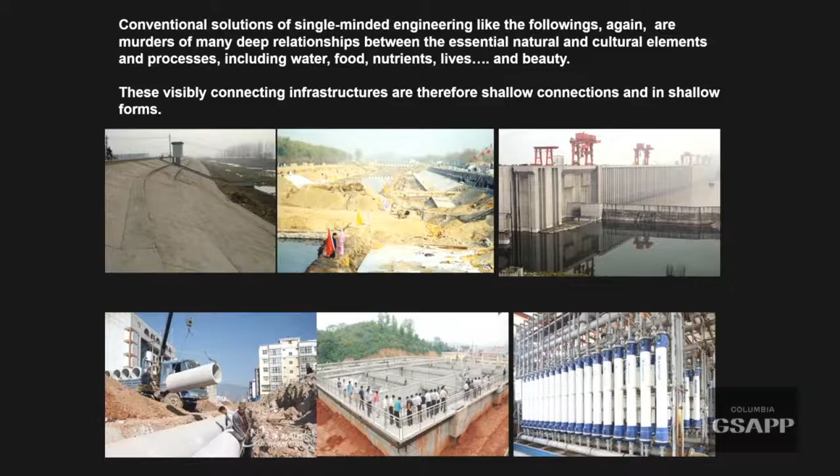And conventionally, the conventional solution of single-minded engineering is like the following: damming, dikes, pipelines, sewage plants. All these are actually, as I mentioned, murder of many deep relationships between the essential natural and cultural elements and process, including water, food, nutrient, lives, and beauty.

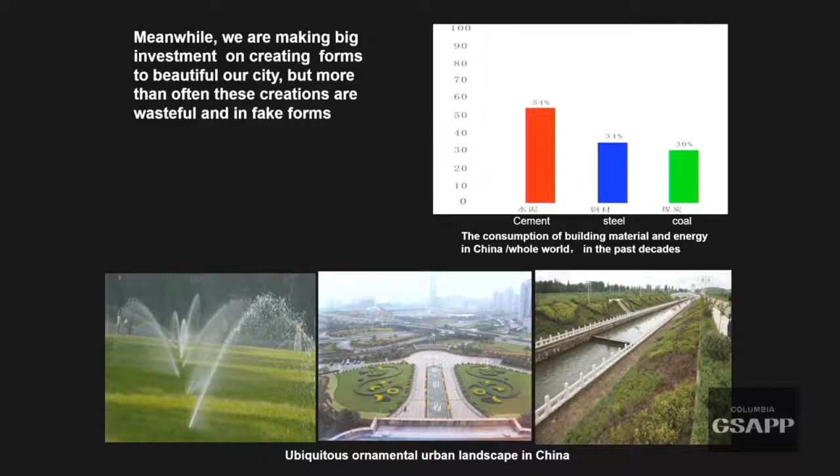Now these visible connections, connecting infrastructure, are therefore shallow connections and in shallow forms. And meanwhile we are making big investment on creating to beautify our city, but more than often these creations are wasteful and in fake forms.

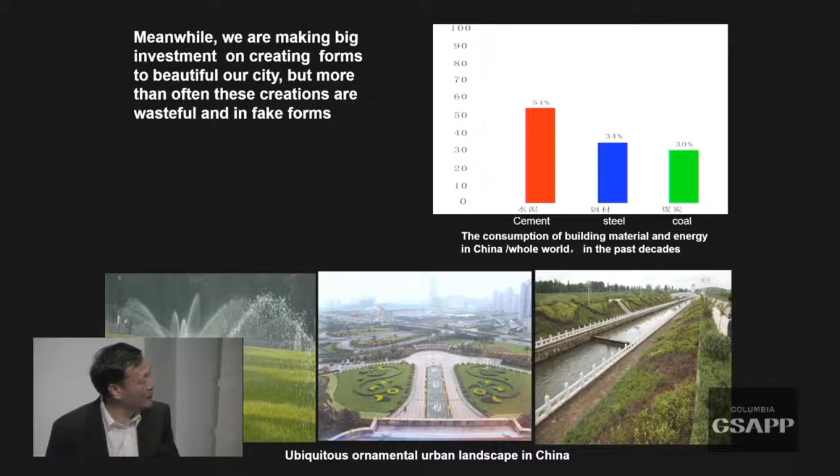In the last 40 years, almost every year China consumes over half of the cement, a third of the steel, and a third of the coal of the whole world, and builds something we call beautiful. So ubiquitous ornamental landscape, you can see it everywhere in China.

Now that's why I call it a revolution. I call it the Bigfoot revolution versus the small, gentrified little feet. So that's a different value, a different aesthetics. Now today I call this aesthetic the aesthetic of ecology.

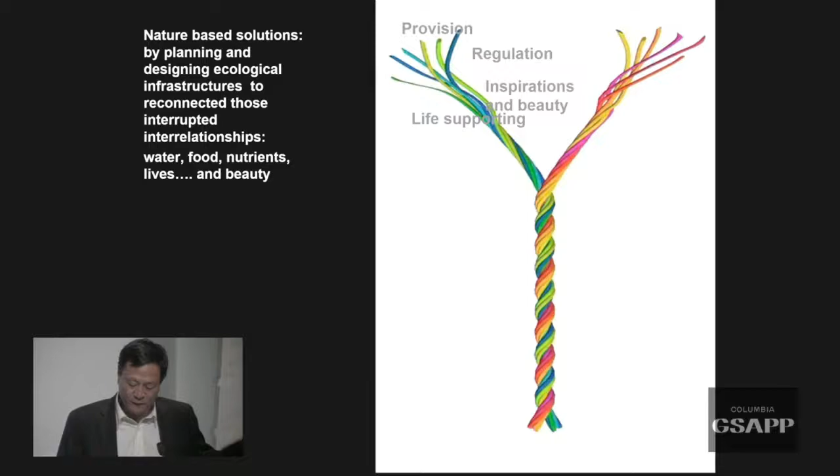So we need a kind of infrastructure, the nature-based solutions. So by planning and designing ecological infrastructure to reconnect those interrupted relationships—water, food, nutrient, and beauty. Such solutions result in deep forms that stand in contrast to shallow forms, which have only the superficial perceptual order.

And lacks the solidity of a coherent process beneath the surface. Here I describe as deep form the terraces, rice paddy—productive, beautiful, high performance, sustainable. And the other is shallow form or fake form, unsustainable, consumptive. And the shallow form can be at a larger scale.

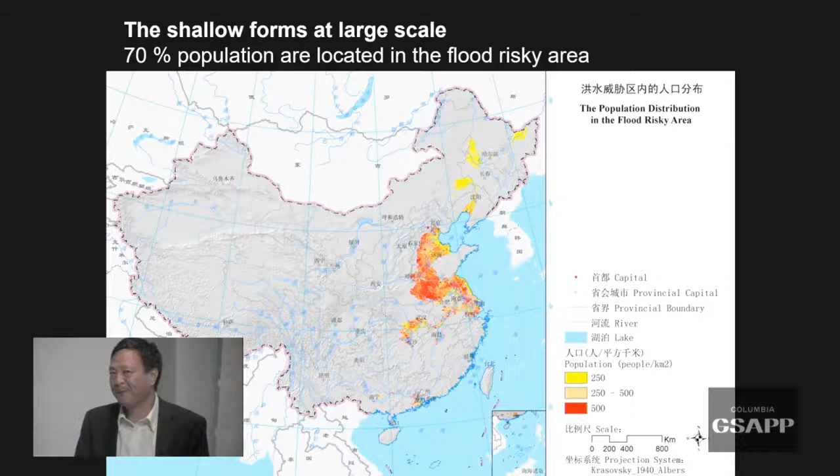Now this whole China's urbanization pattern—70% of immigrants, 70% of urban population are located in the flood risk area. Now this happened in the last 40 years. So this is a shallow form of urbanization.

So the timeless interdependence of human culture and nature has built up the deepest bond between peasants and their farmland. Therefore the creation of deep forms can be inspired by the wisdom of peasantry. I just talked with Kenneth about farming, how farming became necessarily part of my career.

It's because I learned field making, irrigating, fertilizing, growing, and harvesting. Now these basic skills of farming, because of survival meaning, create deep form. You can see they're beautiful, but they're high performance, functional.

For over 20 years, my team at Turenscape and Beijing University have been testing such solutions in over 200 cities, and showcased a number of replicable models for healing and transforming our land at various scales.

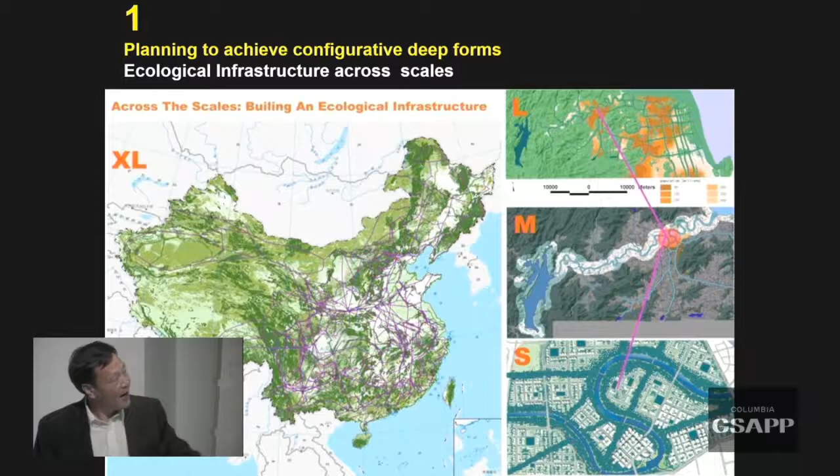So basically two categories for my practice. The first category is planning to achieve these configurative deep forms, basically ecological planning, inspired by McHarg's Design with Nature, of course across the scale, from national scale to regional scale.

For example, at a national level, every year flood takes only actually less than 1% of national land. But we invest hundreds of billions of dollars trying to build walls to protect the city, to protect the land from being flooded. Why do that?

Because we try to create those shallow forms. So look at that, that's the result: 70% of GDP is actually produced in the floodplain. So that's really a shallow form—we built a city in the wrong place at the first hand.

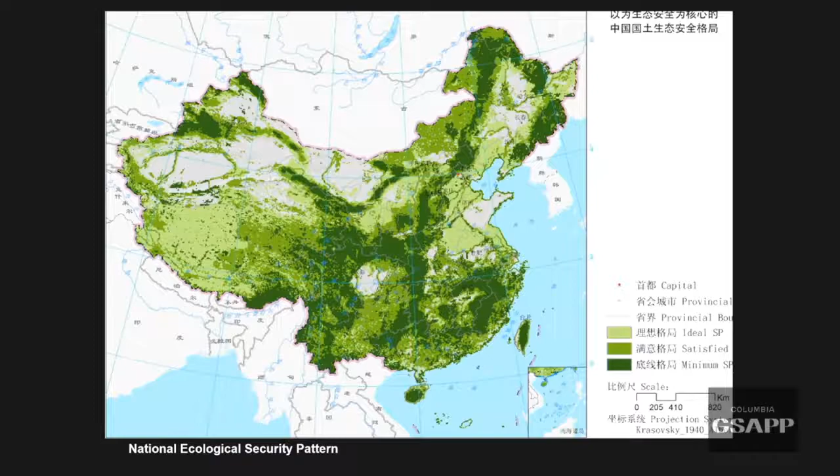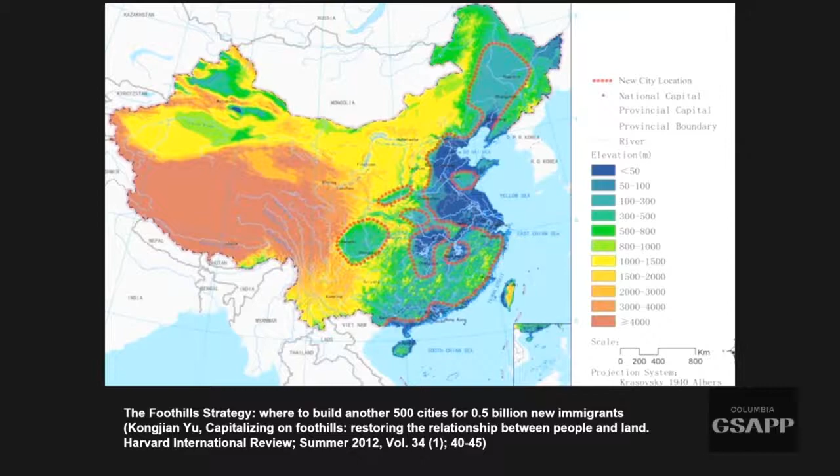So that's the project, the largest project my team did, is to define the line between nature and culture. Try to create a deep configurative form, a boundary between nature and urban development, and eventually develop the idea of what could be a deep form, which means adaptive to ecological process—particularly flood, desertification, agricultural land—and it came out as this idea called the foothill strategy.

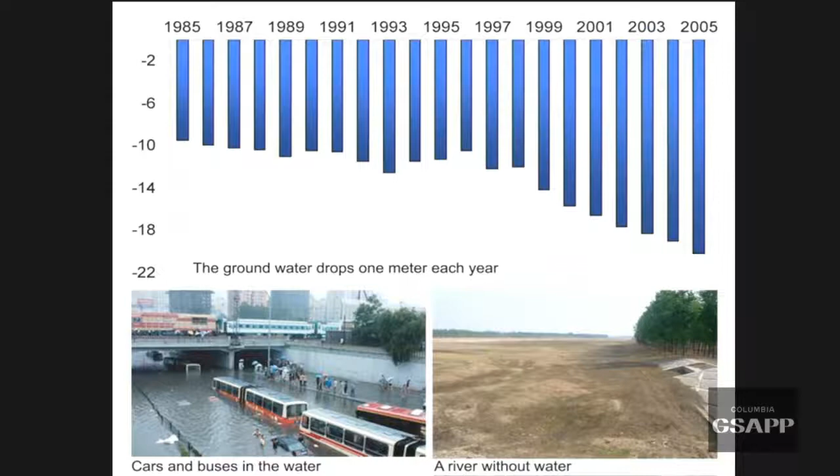Now I'm not going to talk too much about this. At the regional scale, Beijing, for example, urban sprawl spread four times and took over everything when the infrastructure goes, when the pipelines go, when the highway goes. We overuse the groundwater, which drops one to two meters every year.

All the rivers in the Beijing region can be seen dried out, but at the same time the streets get flooded almost every year. In 2012, 79 people died in their cars, on the street, and in the river. So we are in bad shape.

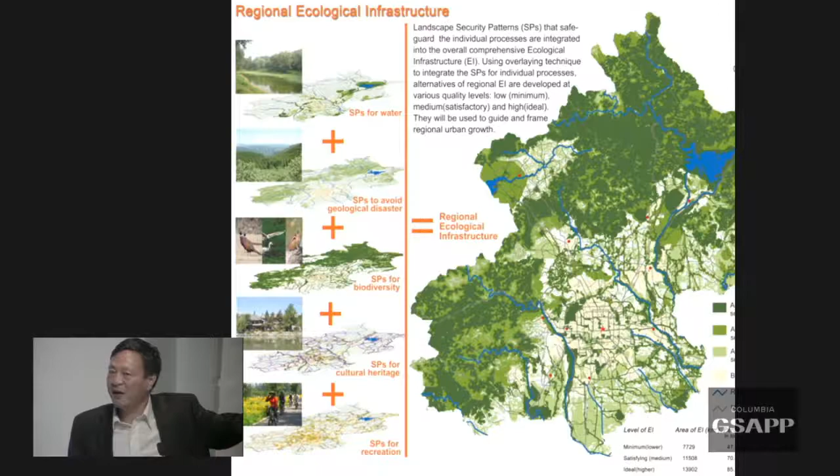So we developed this landscape security pattern to tell the municipal government how we can create deep-form urban development, integrated with stormwater management, habitat protection, cultural heritage protection, and a green bicycle lane, green transportation system.

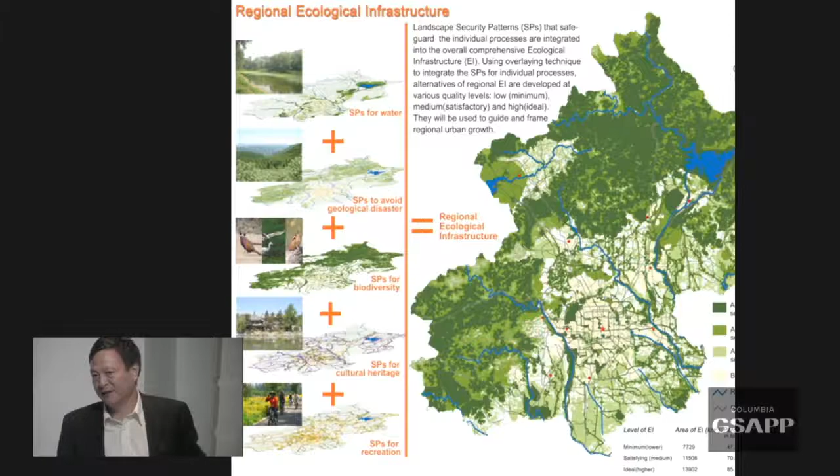So we developed this landscape security pattern, a green infrastructure, and this green infrastructure will lead future urban development. So instead of urban sprawl without any frame or restriction, we say landscape will become the frame.

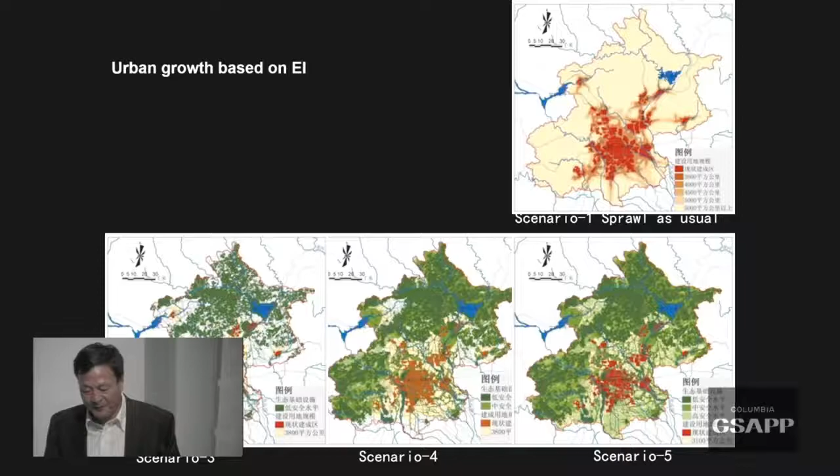This is what you guys called landscape urbanism - landscape leading the way of urban development. This has been done almost 12 years ago and been partly accepted, at a medium scale, about 10 square kilometers, for example.

This is a case we did also about 10 years ago. Instead of the conventional way - leveling the ground, building infrastructure, laying out drainage systems, pipes, gray infrastructure - now we say, why don't we protect all this pond system?

They've been here for hundreds and thousands of years. Farmers developed this - we call it the sponge, the land as sponge - regulating the monsoon climate. In dry season they use water to irrigate; in monsoon season they keep water.

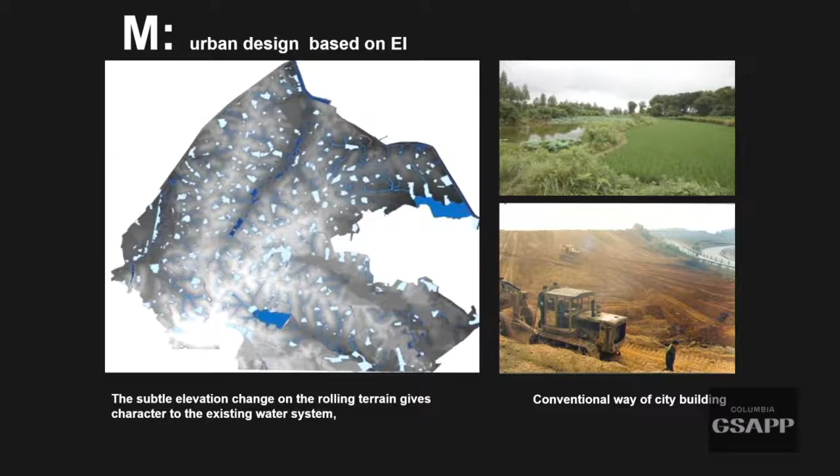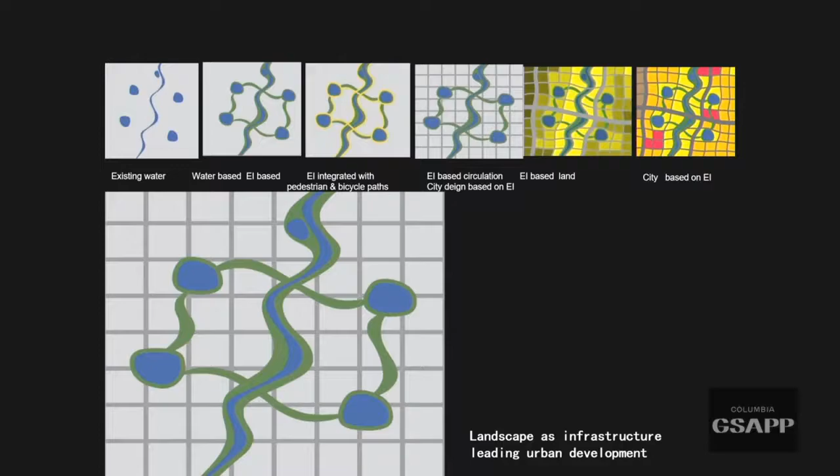So we develop this landscape as infrastructure without pipes, without drainage pipes of course. Using landscape as infrastructure to integrate drainage, bicycle, pedestrian, and park systems together to develop this area - saving a lot of money. 15% of investment can be saved without leveling the ground or laying pipes, creating infrastructure based on using landscape.

That was a rendering 10 years ago, and this was built. The whole city, almost the whole city in Wuhan, was flooded a year ago - a big flood causing urban inundation. This town survived because we created this resilient landscape, not depending on pipelines.

This landscape becomes a filter, becomes a sponge to regulate water, and we don't need water to irrigate the landscape, the trees. This saves a lot of money.

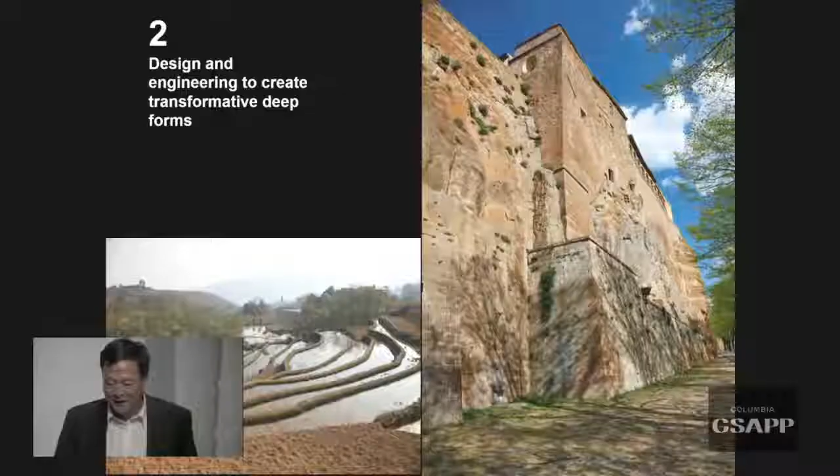So this is basically the strategy for planning - creating a configurative deep form across scales, from national scale, regional scale, to urban, to community, individual city scale. Now I want to spend more time on this.

The second strategy is design and engineering to create transformative deep forms. These are typical transformative deep forms, where you cannot separate culture from nature.

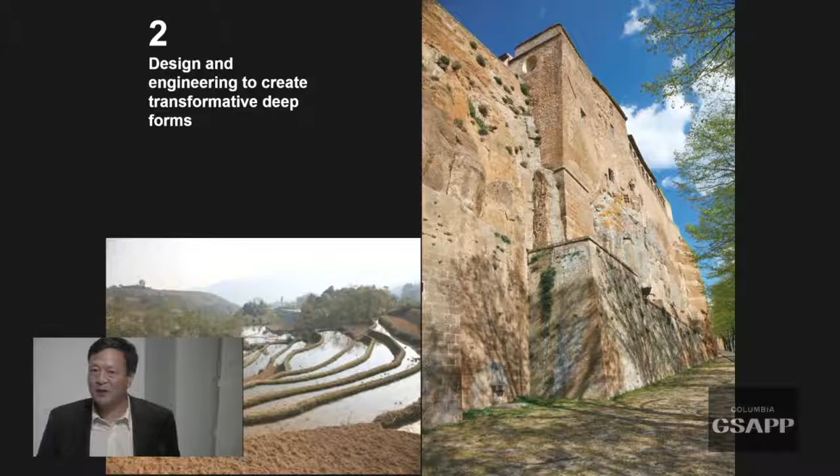So with terraces, you don't know where is culture and where is nature - the culture is dripping over the nature pattern. So it's deep form, it's deep form. And the building, of course, is an Italian one in Orvieto - a beautiful building. You cannot divide, you cannot separate nature from culture.

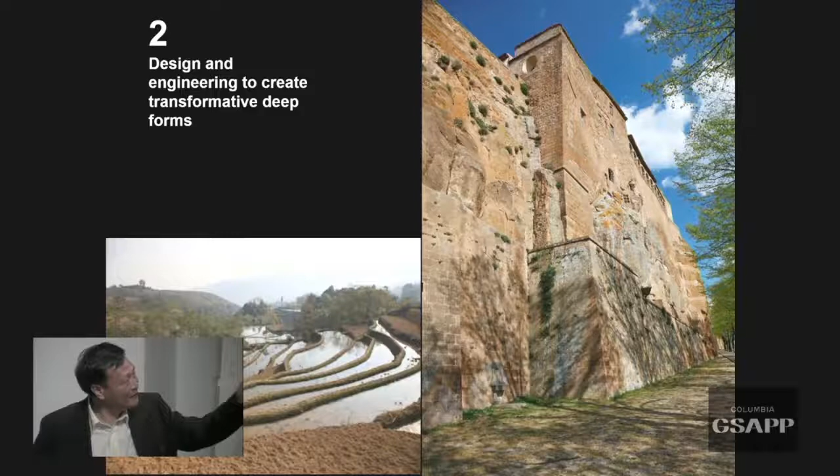How can we create an upgraded model of deep form to solve today's problem? The first principle, the first approach, is make friend with flood. Annual flood damage costs $100 billion US dollars in China every year, and 10 million people are affected each year.

All rivers in China have basically been channelized like that, dammed and channelized in order to protect from flooding. But that only makes the case worse. For 5,000 years we've been fighting against flood with this kind of solution.

So we take a nature-based solution. This is a case we did in 2003 in Zhejiang province. The river had been channelized, and the mayor got a lot of complaints from the farmers because their buffalo had no place to drink water.

Usually the buffalo go to the creek or river to drink water, but now the buffalo had no place to go to swim, bathe, or get water. So he called me as a landscape architect to see how we could find a better solution - to make it safe for the buffalo, but also safe for people, and beautiful.

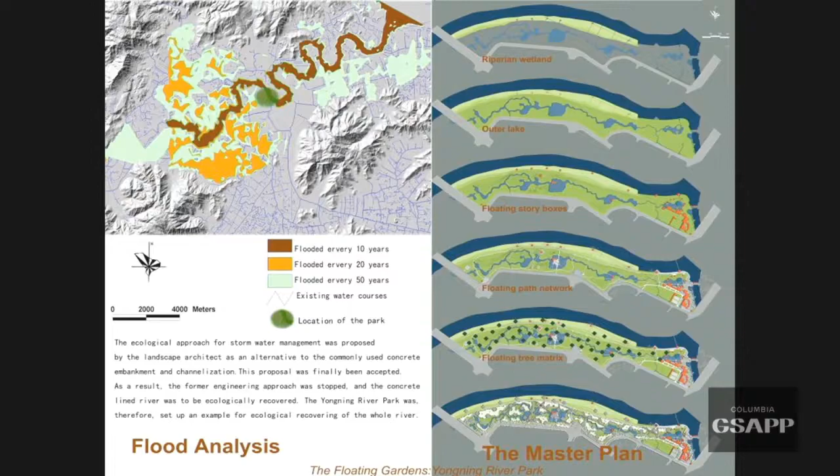There's a 10-year flood, a 20-year flood, a 50-year flood. Actually, the flood didn't go anywhere - the flood has a place to go. So why don't we adapt the flood pattern to create urban development and landscape, so that we can have a deep form without a wall?

So that's before, in 2002; now that's today. Again, transformative - creating a buffer, creating a resilient landscape so that we can adapt to this seasonal, monsoon climate.

This is actually a dike, and that's an inner lake - so people and water share the space. Because monsoon only comes for a month or two, and flood can only come for maybe 2 hours, why bother to build a line between the people and the water?

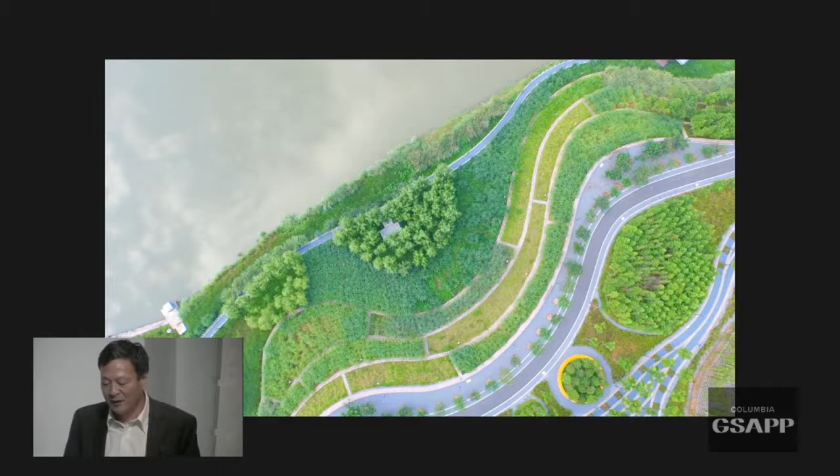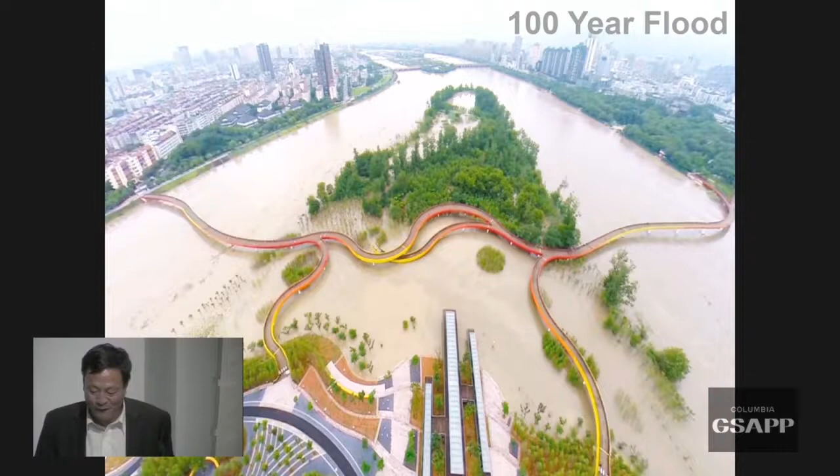So these become a sponge, resilient. This is in my hometown, an even more serious flood wall on a big river. Again, we convinced the local mayor to transform it, remove all the concrete, and replace it with eco-friendly landscape, terraced like farmland - simple cut and fill to create terraces, becoming friends with water instead of fighting it. A 100-year flood came immediately after the park was built. People were surprised, the whole park flooded. But just two weeks later, the flood receded, and the land became fertilized with more lush vegetation. During the dry season, the park becomes accessible landscape. It's a resilient landscape - making friends with flood, sharing the space between people and water.

The second principle to create deep form is to go productive. As I mentioned, China has 20% of world population but only 8% of world arable land, 10% of which has been lost in the past 30 to 40 years due to urban development. When you fly into Hangzhou, you see the massive scale of urbanization taking over all this fertile land. This case, built in 2003, demonstrates that productivity can come back to the city - green space can be productive.

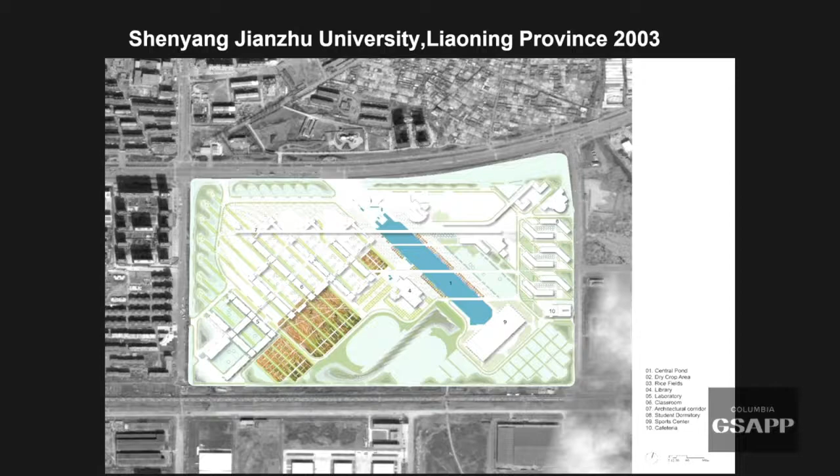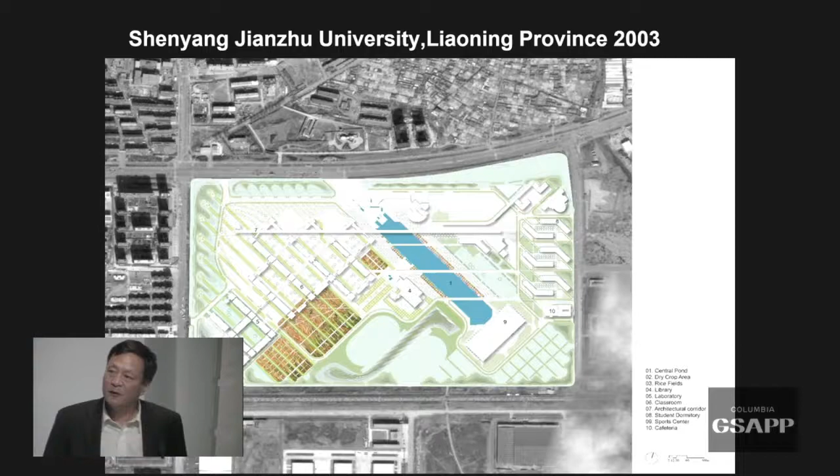This is Shenyang Jianzhu University, 1 square kilometer in size. We collect stormwater and use it to irrigate the field for rice planting, and put students' studying rooms right in the middle of the rice paddy. So that's a water collection pond, this is an irrigation system, this is a classroom.

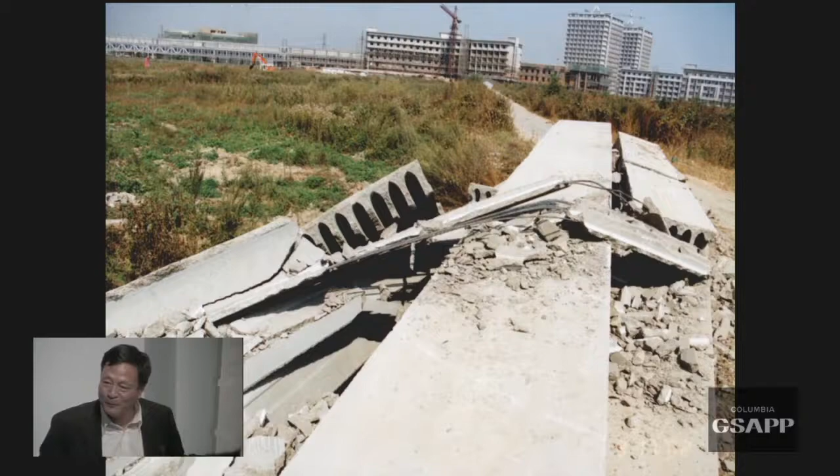That was the site, in March, and the president of the campus wanted to open the school in 6 months. How can you build a campus in 6 months? He had no budget because he used it all for the building - you know, all Chinese clients want buildings, architects, right, beautiful - but have no budget for landscape. And he wanted it unique and beautiful still. How can we do it?

As I said, the rainwater is free. Collect the rainwater and irrigate the land to create a landscape which can be beautiful with no budget, because all Chinese farmers know how to cultivate the land - minimum cost, even cheaper than a lawn, than a piece of land. So it became really a rice paddy farm. Local farmers come in to raise sheep and goats, and students use the space, professors use it for study rooms, and the path from the library to the classroom.

Certainly, this is post-agriculture - a productive agriculture, but urbanized. The professor here is happy because he can walk on the path to the classroom through the field. But he's happy, you know why? Because he has shoes on, right? If you have bare feet, you will not be happy - like me, I walk in the farm with bare feet. So, dressed, that's a new aesthetics.

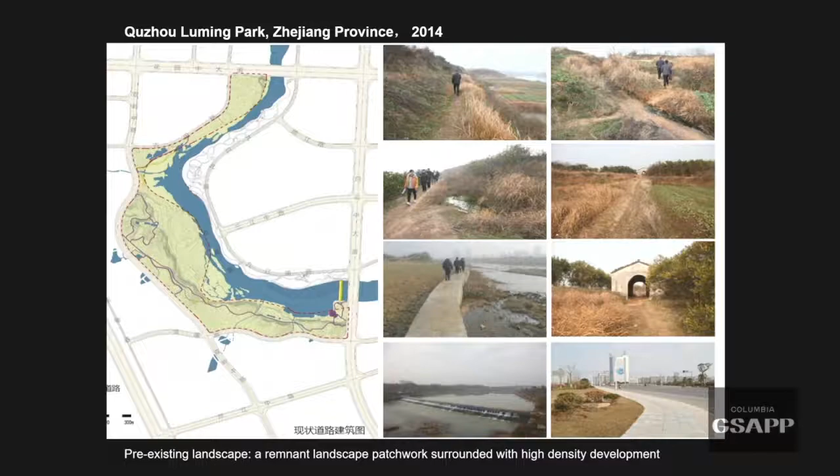It became a treasure, an iconic token for this campus. That's an experiment from 15 years ago. Now we replicate this idea at an even larger scale.

Here in America we call it agricultural urbanism, or urban agriculture. This is a case in Quzhou, in Zhejiang province. Quzhou was a city during World War II—the American Air Force was supposed to land in the city but failed, because of the distance from Tokyo. But this city, Quzhou, had an airport at that time. That's the site, an abandoned farm.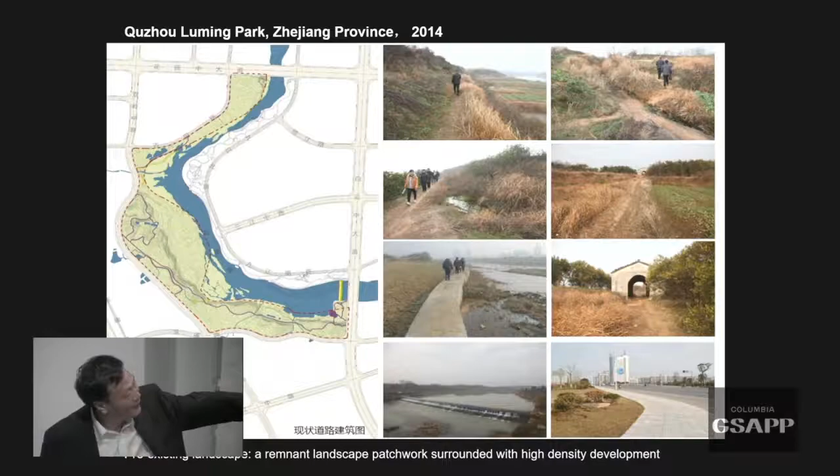It's also a floodplain. That was the site. Urban development was happening surrounding the whole area, but the farm was abandoned. So we recovered the farm and created a flood-adaptive landscape, adapting to the river and making the landscape productive again.

Here the fields become productive but also urbanized. People can use this space. These are pavilions, inspired by local pavilions, for rest, for shade, for farming, but also for urban recreation. The buildings totally surround these areas, floating above this floodplain with these pavilions.

That's the site. Again, we revive agricultural technique, a very simple one. We create this pond system to regulate water for the dry season and the wet season, and plant and rotate the crops. That's very simple rotation, a very ancient wisdom. So you don't have to fertilize the soil, because the crops produce fertilizer. During the season, you can have sunflowers, canola flowers, meadows year-round.

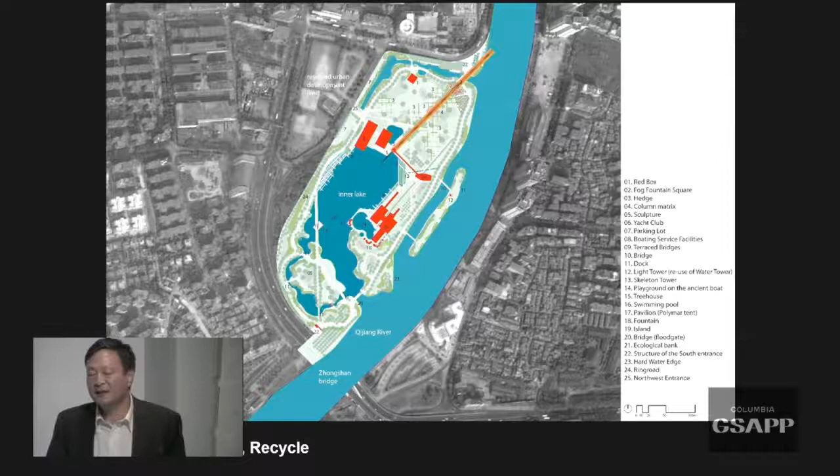So what should we do? The mayor came to me and said, 'When I demolish everything, please come design a fancy park for me.' When I saw the picture, I said no, we should not demolish—when you demolish, you immediately lose contact with history. So I was able to convince him to stop the demolition process and design a park based on the existing industrial structures. That's the setting.

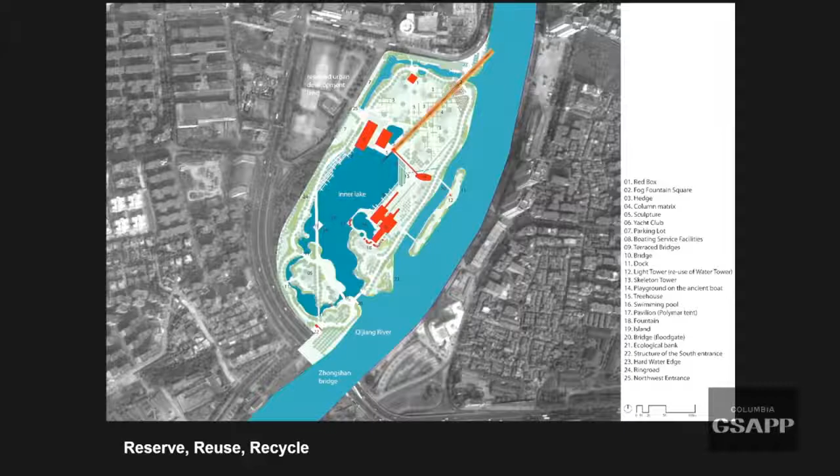It's a shipyard that connects to the river, with a lake in the middle. So we kept everything, including the trees—every tree was protected—and kept the railroad and the buildings. That was the site. Now it's been built.

You can see the change of the city itself, the growing of the city itself. It used to be a very dirty brownfield, and the land was so cheap. Now it becomes the most expensive area, the living room of the whole city. That was the site at the beginning in 1999.

Now it's transformed—transformation adapted to the flood. The river is connected to the ocean, so there's a tide of 1.1 meters daily. These terraces are designed to adapt to the flood and the tide, and to recover the ecology of the site. From another angle, the two structures are recovered. You can see three 5-star hotels built around this park now. It becomes the most sought-after place.

Again, here we created a landscape that terraces down to the waterfront, making friends with the tide. A structure was kept and reused, now the Sheraton Hotel, along with another international 5-star hotel. Here is the most expensive apartment building in this area. That was before—this is today.

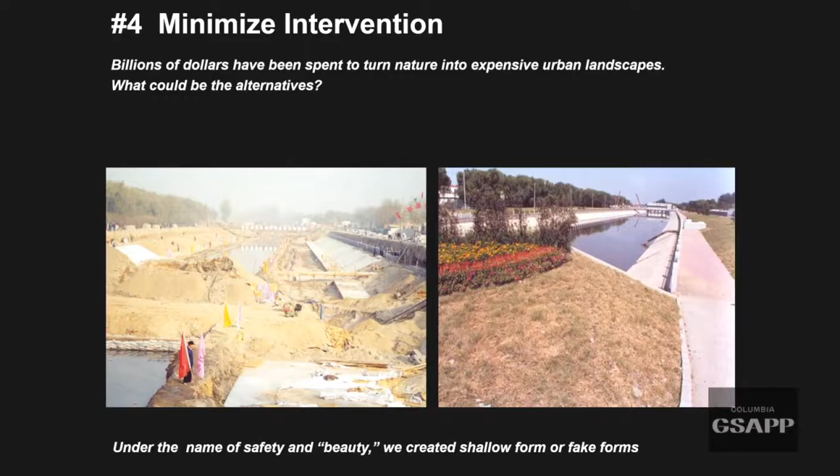The fourth principle is to minimize the intervention, to maximize the return. But in the past 40 years, all the engineering work was to maximize the change - a lot of engineering, a lot of investment, a lot of concrete. Can we do minimum? This is the case - we want to demonstrate that if we do minimum, we can still provide services, but at the same time create a totally different, beautiful landscape.

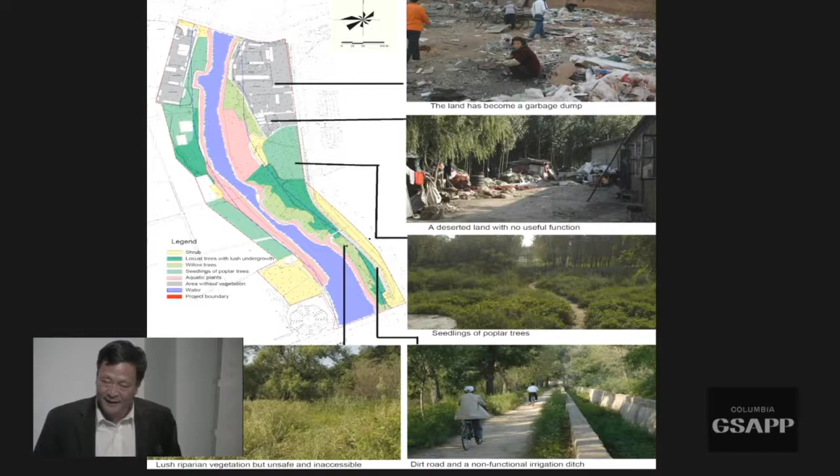There's another site in the coastal city of Qinhuangdao in North China - very dirty but messy ecology, very lush. As I said, conventionally people would remove everything, but here we just keep it as it is. Nothing, almost nothing changed - no terrain change, no movement of earth, just one bench, the red bench.

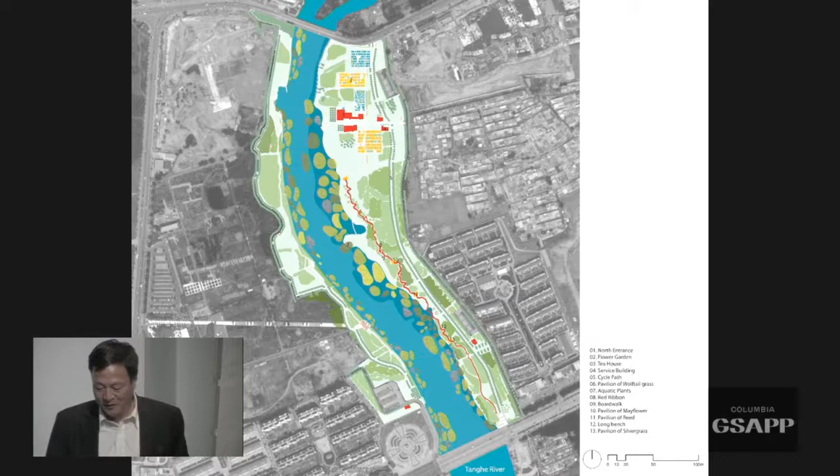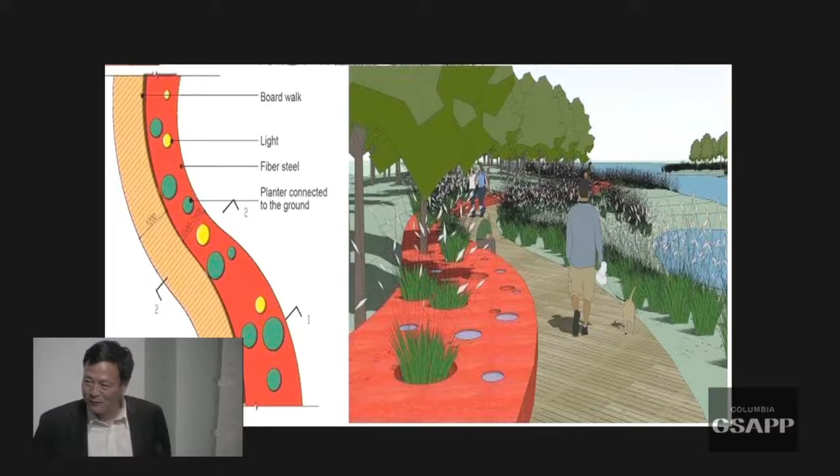The bench is 500 meters long, and it can fulfill all the desires of urban residents - they want safety, seating, lighting, boardwalking. That's all we need. We don't have to change nature. So that's built - just put one bench.

The rest of it stays untouched, even these - we call them weeds, messy weeds. Nothing has to be changed. In China, the landscape you see often has ginkgo, pine, beautiful trees, but those are costly, expensive. Here we keep anything as it is, messy. But suddenly this place becomes a favorite, safe place for people.

Look at these three ladies - in the morning, in the night, they're still here, like it's an outdoor space. Because they feel upgraded, they feel urbanized, modernized, even though they're still in the messy nature.

Now this, I call minimal intervention. You don't have to go to cosmetic surgery, a plastic surgery doctor here - you just need a bench, a little bench. You can turn messiness into beautiful landscape.

That's what we did with the seedlings - again, nothing changed, just cleaned up and put a bench through it. Now it's become such an attraction for the residents.

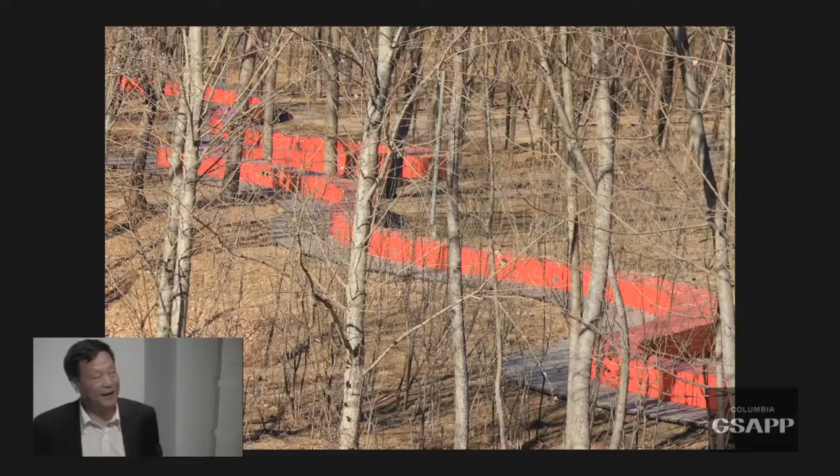In 2008, Condé Nast Traveler magazine in America named it one of the new 7 Wonders of the World, that year together with the Olympic Stadium in Beijing and the Dubai Tower. That was the site - messiness, nature, low maintenance, no irrigation, no fertilizer. That was the site at night - people use it even in winter, in the snow, and nothing changed, just one bench. So this is minimized intervention.

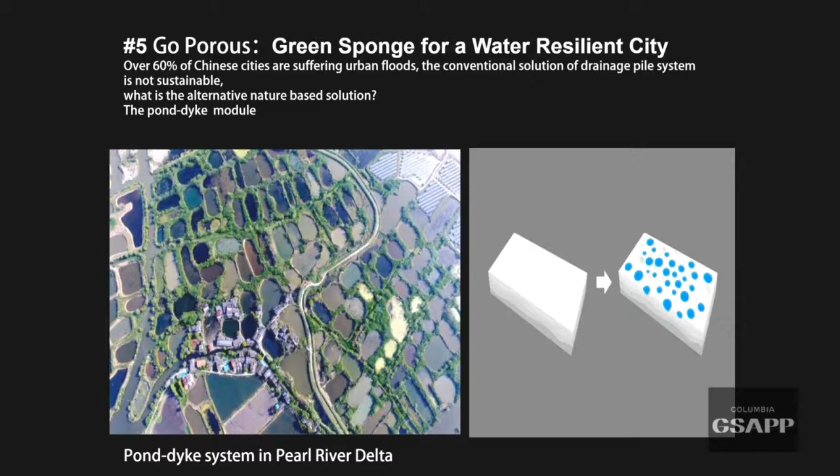When you think about China, you realize we have such meager natural resources. So we have to keep all the natural assets as much as possible, but at the same time still get urbanized, or upgraded, or what we call civilized.

The fifth principle is go porous: green sponge for a water-resilient city.

Over 60% of Chinese cities are suffering urban flood. The conventional solution, learned from developed countries, is to build pipes and drain away all the water. But we are running out of water, so why don't we keep the water instead of draining it away? We are inspired again by farming technique.

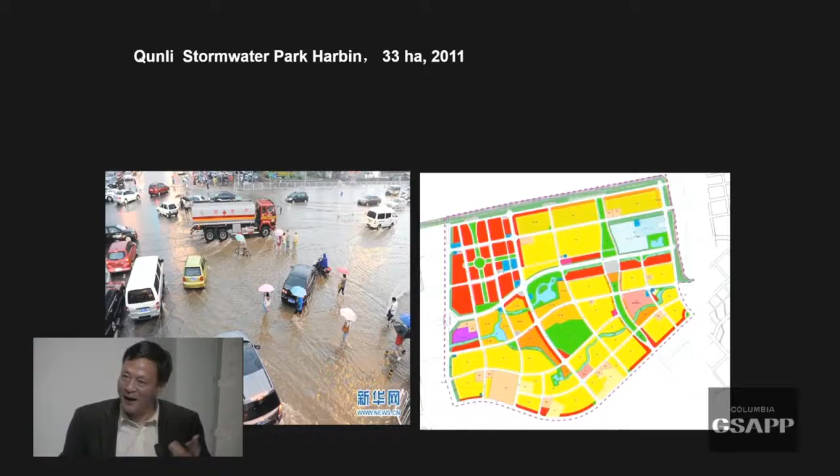So that traditional solution can also solve today's urban problems. There's a project in Harbin, North China, 33 hectares in size, right in the middle of a new town. It was planned as a park, but people didn't know how to do this park, so I was called in to design it. I tried to test the porous landscape, this sponge, to collect water, keep the water, clean the water, and recharge the aquifer.

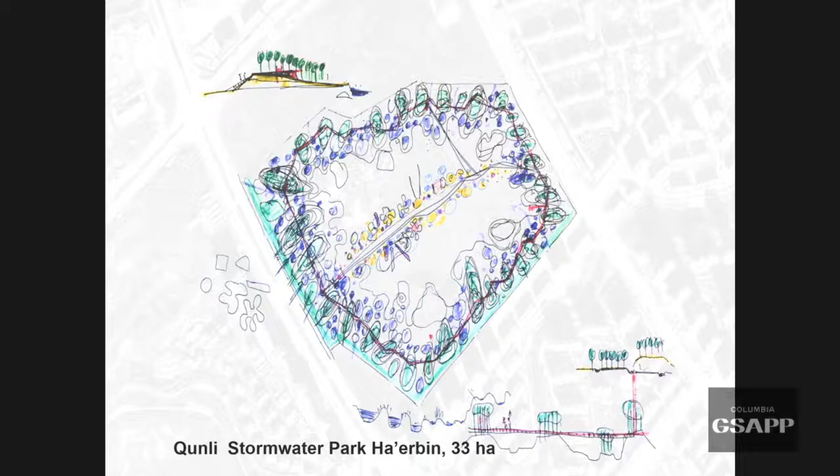That was the site—urban development already surrounding the whole area, with a park in the middle. That's on the surface. That's my first sketch: porous, cut and fill, leave the central area alone, and put a walkway above it. That's a cut, fill, and put people above it.

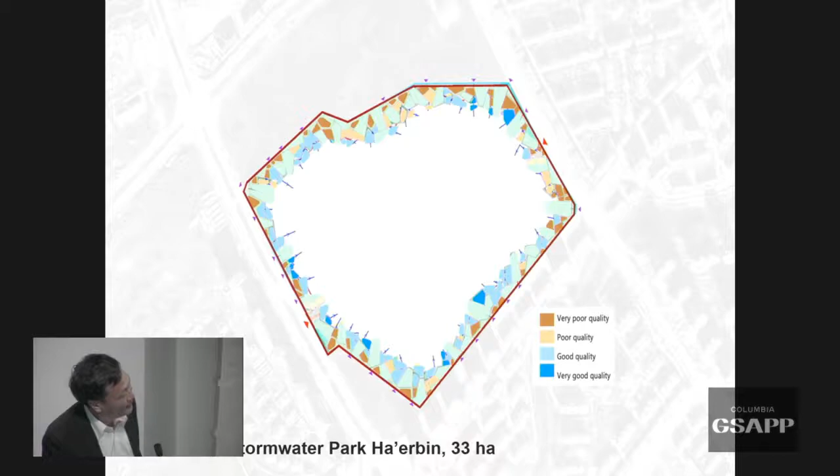Now the water runs into it—all the storm water runs into the park and gets filtered and cleansed. That's the test: dirty water becomes cleaner as it goes through to the middle. The minimum touch again leaves the central part open, and that's where a wetland is created. You can see in the first rendering the boardwalk above, the porous landscape, and the biodiversity.

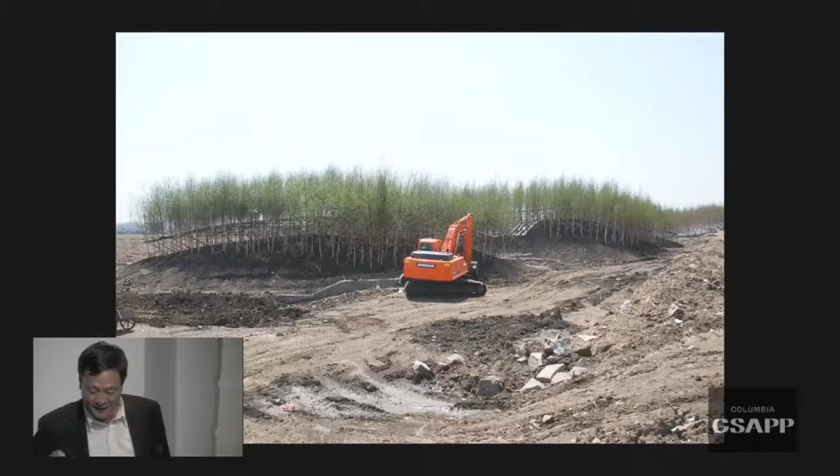You can just use one machine, not two, to create the landscape—that's a big benefit of the construction technology, minimizing the import. That was the site again, as it is today: porous landscape at the periphery, cut and fill, cut and fill, repeated, so you can see all this filtration porous landscape.

A couple years later, you will see—before there was no city here, and that's in just two years. This becomes the central park, basically, of the whole new town. That's the filtrating system: dirty water becomes cleaner, and clean.

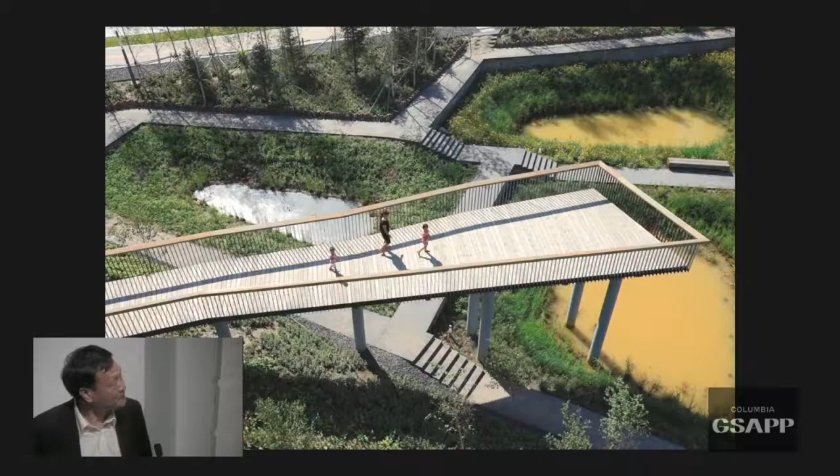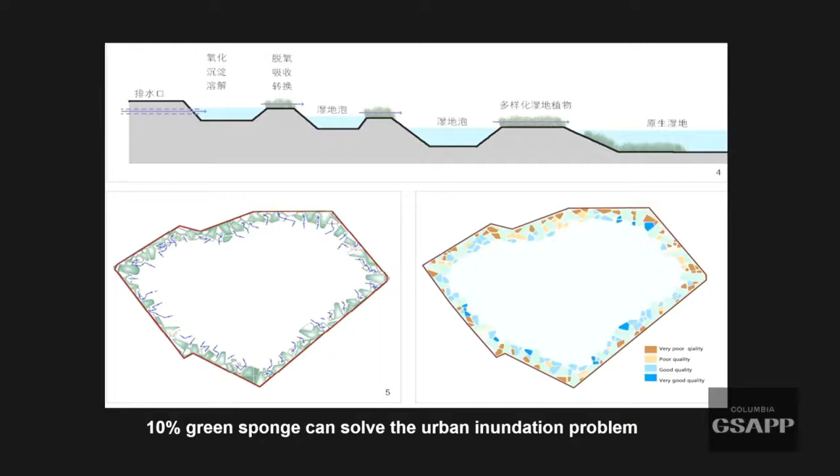That's a fill—a couple years later, it looks like that. That's what was just built, the first year. So the whole system becomes porous, sponge-like. Two years later, it's filled with abundance of vegetation adapted to this kind of wetland system. Now that's the test—let's see the result. My student did research, a PhD, actually doing observation based on this experiment.

We found that 10% of green sponge will be enough in this area to solve the urban inundation problem—no pipes needed in this case. In South China, it would maybe be 20% maximum. So this can solve the problem of urban inundation using landscape.

At the same time, it doesn't just solve the urban inundation problem, but also creates a habitat and public space for people. Hundreds of birds come to the site in the city, so we also have bird watching pavilions in a little form here. You can see bamboo—we test different materials, stone, rocks, wood, as a pavilion to watch and experience nature. This idea can work at very small scale, even at your backyard.

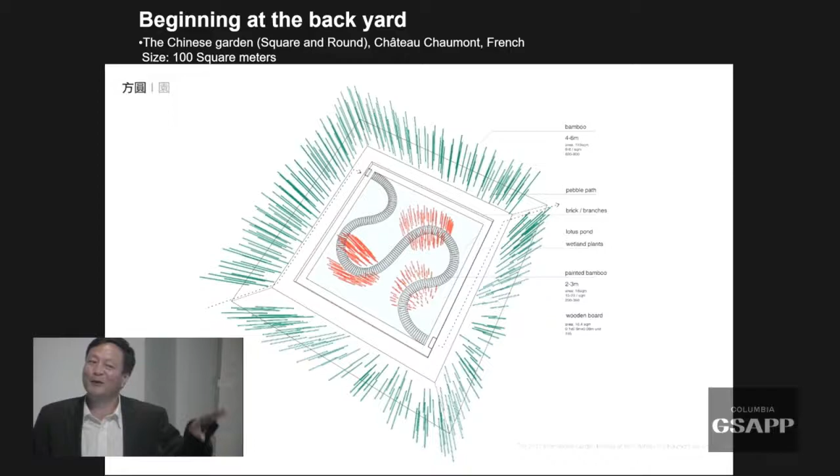This is my small project in France as a demonstration of how you can create your own sponge at your backyard. That's a backyard case—you can see this is Chaumont, Château Chaumont.

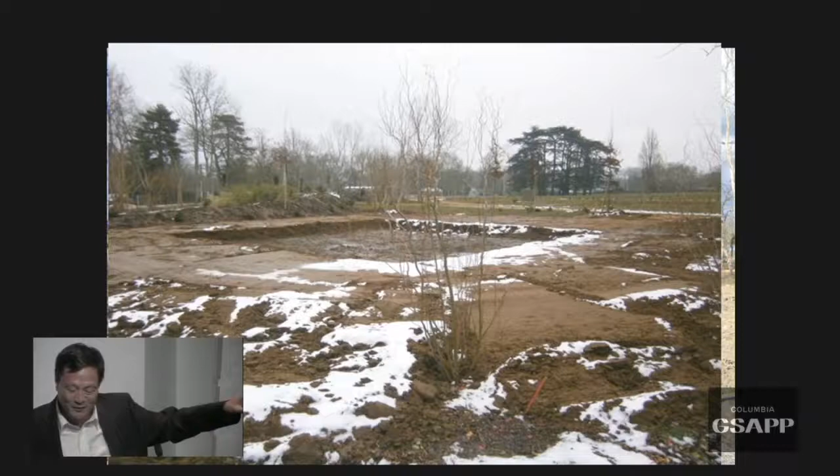That's a small rain garden, cut and fill, creating a filtrating system and using rainwater as a reflection pond to create a little art. It's become fashionable too—a place for fashion shows. Simple, very simple: bamboo sticks, painted bamboo, that's it.

And what about soil, as mentioned? Over 60% of urban soil is polluted. That can be very expensive if you want to change it or clean it. I know in America we have law for soil, the brownfield law.

We just did a small project in Seattle, the Hinghai Park. We have to seal it—you either change it or seal it, otherwise you don't pass. In China, even so, we don't have this kind of law.

But if you want to clean this kind of landscape, in this case very alkaline—alkaline urban sewage runs into this place, very dirty, of course. Again, we create a porous landscape. Let nature work, collect storm water, the rainwater. The rainwater is just acid.

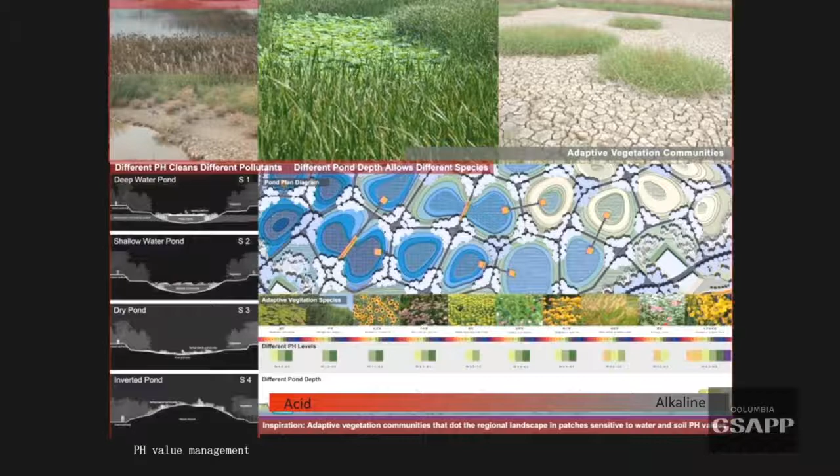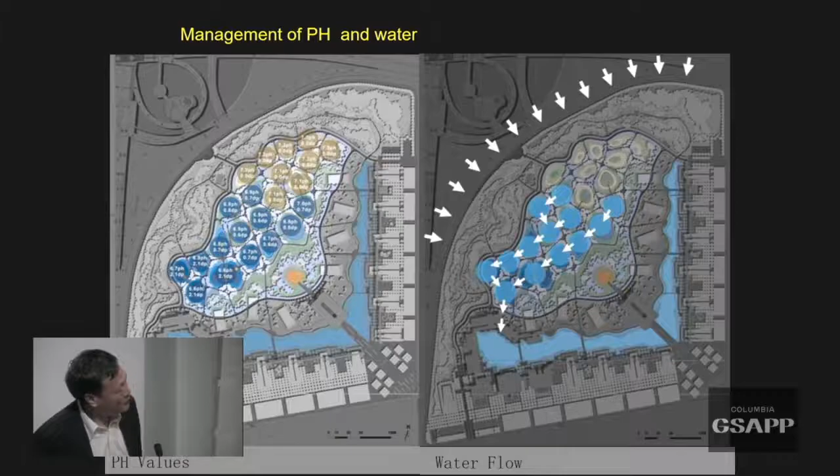So when the acid water goes together with the alkaline soil, you create a chemical reaction, right? It creates habitat. Different pH value will have different habitat. So let nature take over—then actually it's not so slow. In just 3 years, this kind of landscape will be transformed like that.

Porous landscape, collect stormwater—a very simple cut and fill farming technique, but it creates a totally different landscape and habitat: deep water, shallow water, dry pond. So you have totally adaptive vegetation, native vegetation created. You see, people actually love this kind of landscape.

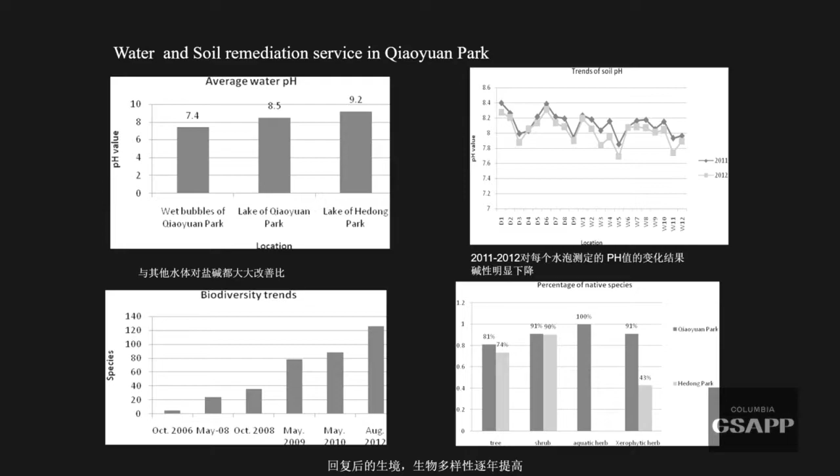And this is functional. This is a test to show how the pH value changed, how the soil quality changed, and how the native species increased in this area.

The seventh principle is design ecologies for water cleansing. As I mentioned, 75% of the national surface water is polluted like that. Basically all the lakes are heavily polluted, nutrient-rich, eutrophic—nutrients, nitrogen, phosphorus.

Basically fertilizers. 30 years ago farmers would love this because they can use fertilizer. But today, because of the industrial idea of buying chemical fertilizer from the factory, they overuse it in the field and it runs into the lake and pollutes the whole system.

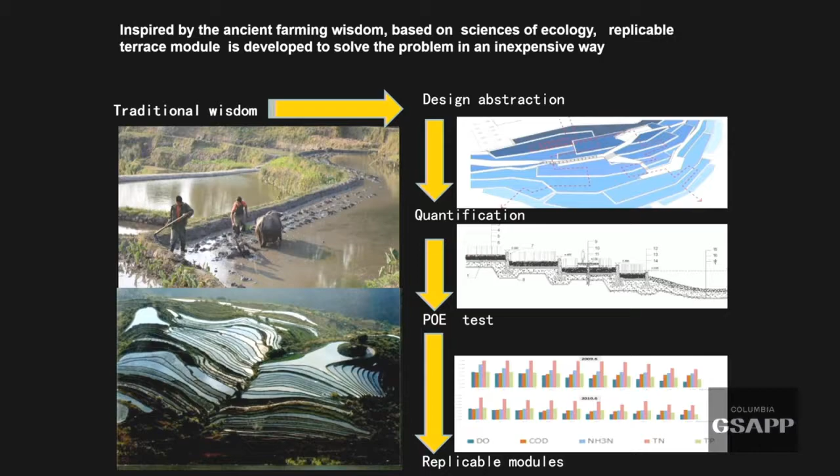So inspired by farming technique, the wisdom based on understanding of science and ecology, we create a replicable terrace module—design abstracted, quantified, and tested through post-occupancy evaluation, POE, and it becomes replicable, creating a model, a new language to replicate across scale, at different scales.

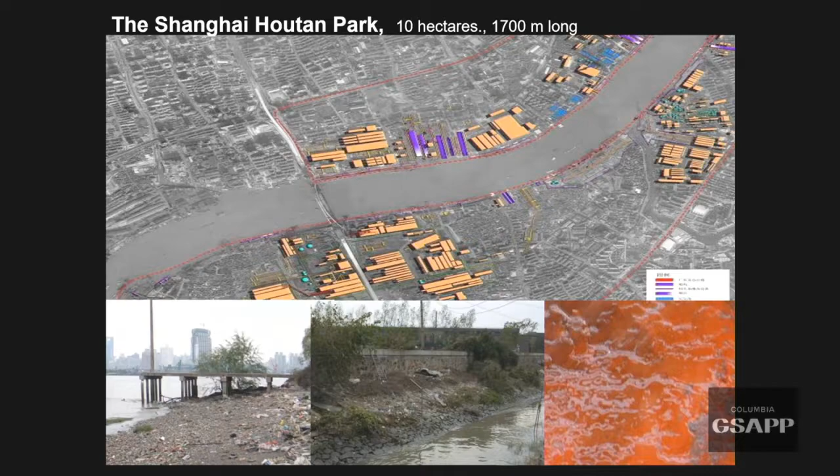This is an experiment built in 2009, Shanghai Expo. It's 10 hectares in size, a 1-mile-long site, heavily polluted water and soil. We wanted to test this as a cleanser, a living machine to cleanse water—from very dirty, what we call 5th grade, to clean, swimmable water.

Using a 1-mile-long wetland, a subsurface wetland, basically learning from farming terraces and aquaculture. A cascade wall creates oxygen in the water, aeration. Back in a sewage plant, you need energy to run the aeration, but here we actually use the landscape. We created a 300-meter-long cascade wall to create oxygen, and the water becomes fertilizer and is transformed.

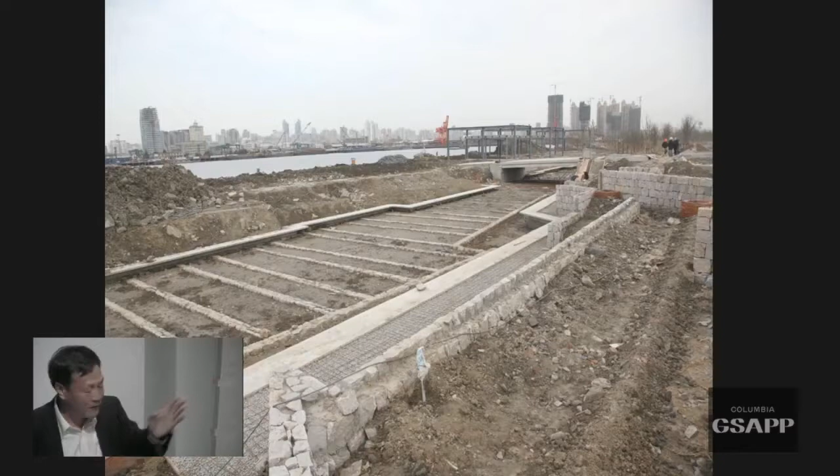And the plants love this kind of water. That was the site—terraces using farming technology, simple, and growing it. Terracing, but here we want to demonstrate how different plant species can be planted, to tell the story that water can be cleansed by plants.

So it now becomes a demonstration to show that after 1 mile, it takes 1 week for each drip of water to travel from source to end. But daily, 1 hectare of wetland can produce 800 cubic meters of clean water like that, which can be used.

It was used in the Shanghai Expo during Expo time, and we certainly tested to see how this is functional so that we can replicate it. Now it's functioning very well—for over 5 years we've gotten all the data and observation.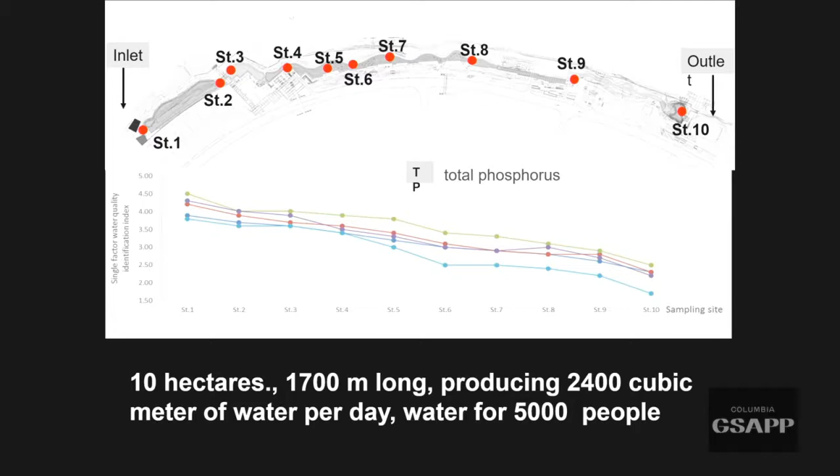So this form is deeply based on this ecological process. Certainly you have this process of harvesting—basically farming, rice paddy, beans, every productive crop rotating again here, you rotate. And also you create biodiversity—20 species of birds come to the site.

And of course, you will integrate with art, with beauty. People, messy, native reeds, plants, integrate with a little bit of shape, form here, and become again a loved place in Shanghai.

And again, we replicate this experiment at an even larger scale. This just finished last year in Haikou, Hainan Island, a tourism island, but it was notorious for polluting all the rivers like that. These are photos from just 2 years ago.

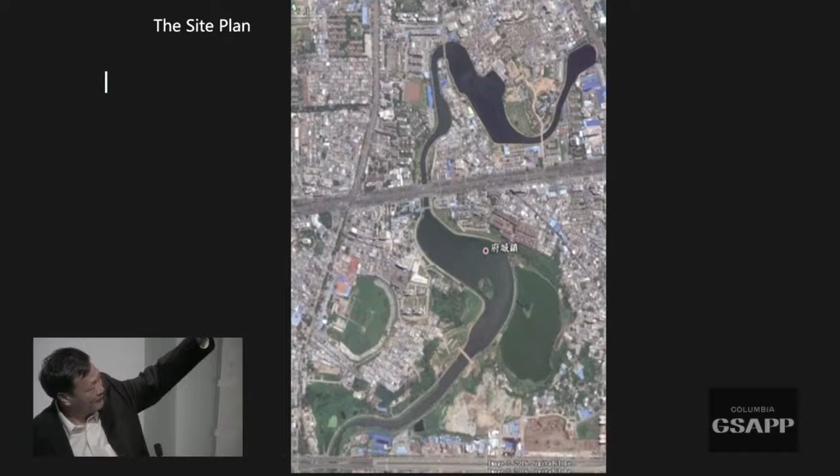So that's the whole river. We are going to transform the whole river using this idea of technique, very simple, deep form, remove the concrete first because it didn't help to clean the water. But the engineers just kept trying these things for 20 years. It didn't work. So that's the landscape we were called in to have a different approach.

So the rest of it will just be fertilizer. We use this agricultural process, the harvest, to clean up the water, and also at the same time create beauty. People love it every day. Hundreds, thousands of people use this park. As you see, it's become a recreational park.

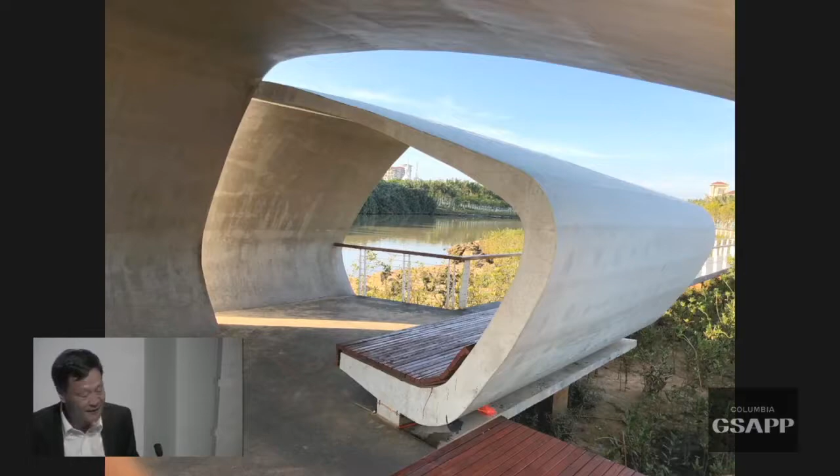Certainly, everything is designed. It's a designed ecology, a designed system. But even here, you can see how the buffer creates a change of water color - dirty water, clean water. Even here, it's visible. Certainly, you have a place to take a rest. That's the water running into the ocean, being cleansed, and you have a resting place, you have the ocean.

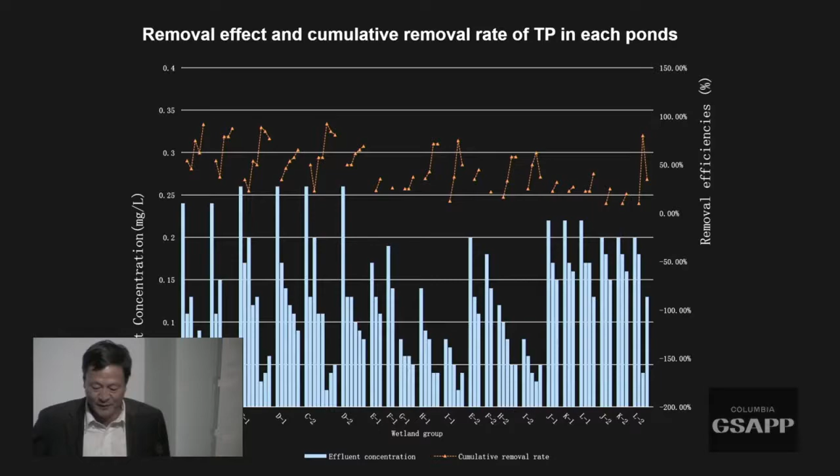And also, we observe it. We have all the data to show people that this landscape is performative. You can use it everywhere, basically in China, to replace those expensive sewage plants in some cases - not always, but in this case, when the water is nutrient rich. And so the green solutions, all these models can be used, integrated for a whole river system or for a whole city.

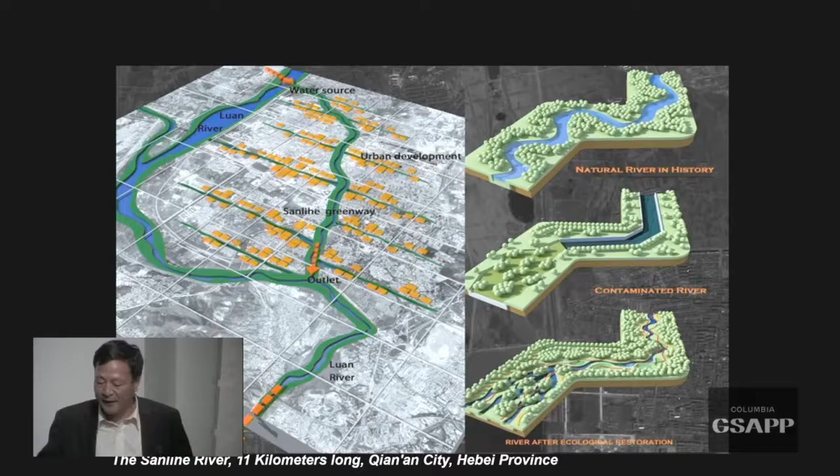Now, this is a long river in this city, about 11 kilometers long. That's the case. That's the pre-existing condition. And so we clean the river, integrating all these techniques I mentioned: stormwater collection, cleansing of soil, and water aeration, and transform this landscape - before, after, before, after. Certainly, you will have these urban furnitures for student use, for people to use.

And it becomes such a welcomed green corridor for the whole city, and the catalyst of urban development. And the real estate doubled in just 2 years on both sides of the river. So the whole city can be transformed.

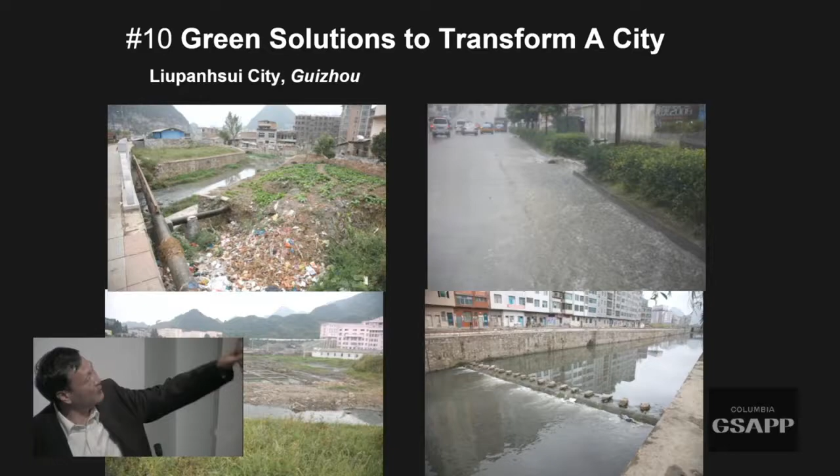We imagine - that's the site of the city called Liupanshui city in West China. It's an industrial city, 60 square kilometers in size, almost 1 million population. Pollution, water, stormwater problems, a channelized concrete river. So the river runs through it.

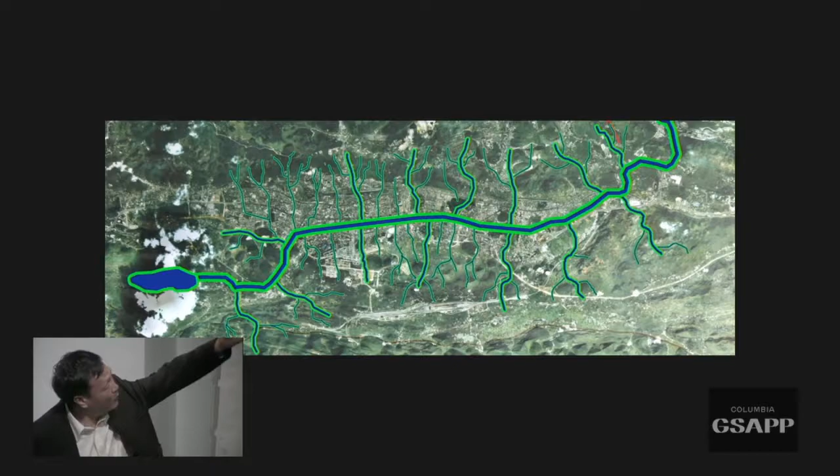So de-channelize it, remove all the concrete, recover all the tributaries, all the stormwater run system, landscape it, and put patches of wetland to cleanse it. And not only that, we put a whole pond system, we call it a sponge, across the whole city. So basically you create a sponge city.

And that was before. 2 years later, we like that - fish come back, soften, the river being soft. It was before, 2 years later.

The pond system, inspired by farming, is a pond system. When the ponds link together, it functions as a cleaning system, a filtrator, and also creates a habitat for biodiversity, and also a park - a lot of people use it every day. Now this has become an international wetland park, even giving identity to the whole city.

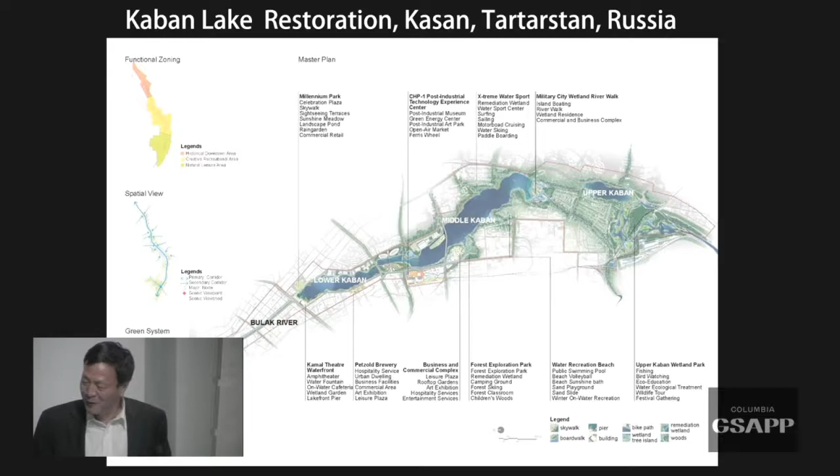Not only in China, but other parts of the world also. Russia - this is in Kazan, Tatarstan. A lake polluted, industrial, it was a brownfield. So we got this competition awarded, and they're very quick - actually, they built this in 1 year.

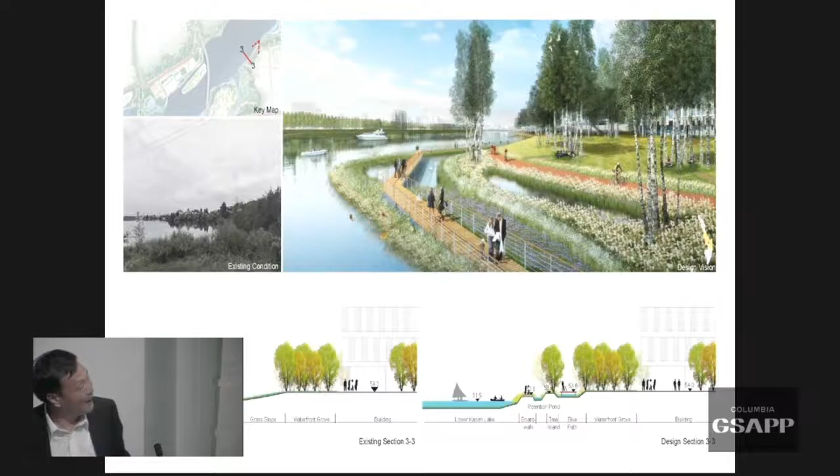That was our rendering at the beginning. That was the site before. It's the same idea of a filtrating system. It was built because they got the football World Cup. So that was built - they built it in May. And they told me every day 50,000 people visit this site.

It's a waterfront, you can see it's a waterfront. Again, this is a terraced filtrating system to clean the water, again creating an urban waterfront for people to use. All packed - the whole city comes to this place. And of course, we have the biodiversity.

Man and nature eventually come together. And finally, we can build this deep form into a home, integrated with the building, even though it's a very small solution.

But imagine, in China there are at least 50 billion square meters of buildings, with 2 billion more square meters added every year. Almost none of them are green, energy-efficient buildings. Almost all of them are wasteful, and they consume a third of national energy consumption. 30% of energy is consumed by all these beautiful buildings, beautiful cities, lighting every night like that.

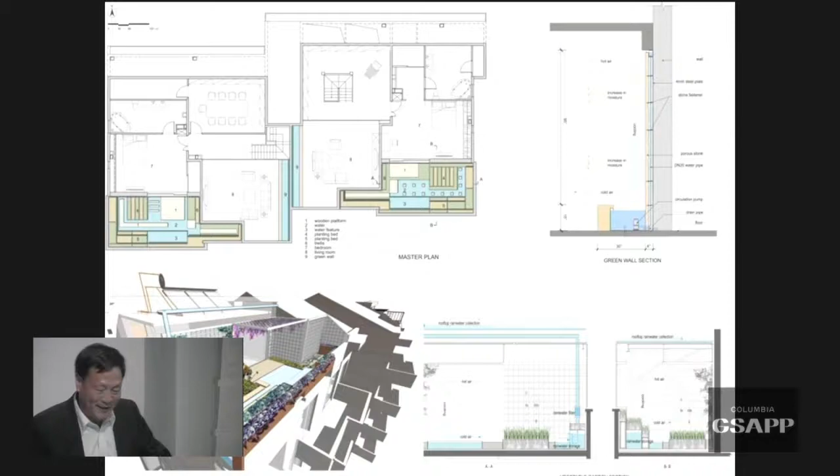So how can we do a little bit of work and transform it into a green city or green building? In my own apartment, I collect stormwater and solar energy, and turn the balcony into a productive balcony with vegetables. Another balcony became a rain garden.

It's on the 5th floor, so it's a productive space for vegetables. I can collect 52 cubic meters of stormwater from the roof every year, store it, irrigate with it, and produce 32 kilos of vegetables for salad, for the kitchen. That's another little balcony stormwater garden.

That's my bedroom here, it's just open. You feel the fragrance every day, because of the gardenia, osmanthus, all kinds of flowers. So even at night, you still get all this fragrance.

In the bedroom and in the living room too, the wall is transformed into a living wall. Now this living wall is different from those living walls in the airport. Those are very expensive, you have to add nutrients, fertilizer, build a container.

Here we just use rocks. All these plants come out from the rock. That's my observation.

I transformed the apartment in 2009, and mosses came out first. The next year, ferns came in. By the third and fourth year, the ferns took over and became abundant. Now that's today, that's today.

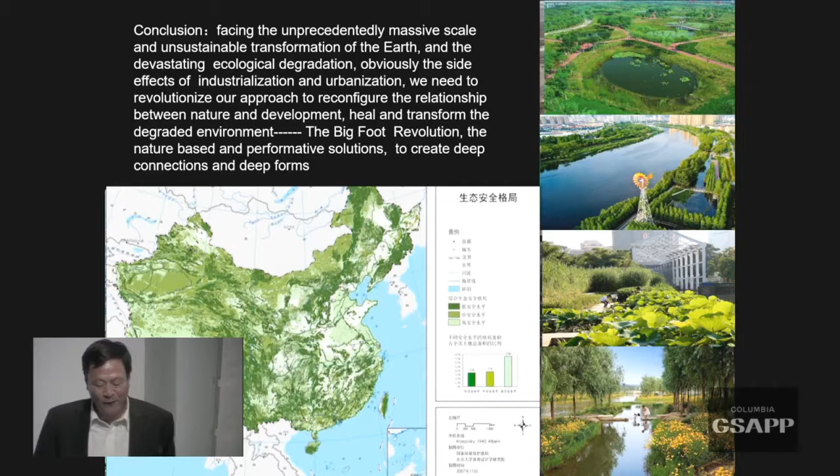So that's what I call the Big Foot Revolution. It's a nature-based and performative solution to create deep connections and deep forms.

This image from 2,000 years ago shows the Chinese vision of the relationship between the land and people's settlement and construction on the land. So we think like a king.

Think big, the nation, the globe, but act like a peasant. All the technique, all the technology, all the design, is actually peasant technology: cut and fill, growing, irrigating, fertilizing, harvesting. That's the most efficient, most cheap solution.

But in order to think like a king, you have to convince the king, you have to make the king believe. That's why Michael Sorkin asked me to advertise his book, his new book called Letters to the Leaders of China.

Because the leader is so powerful, like a king, you have to convince them. If you can convince the kings, you can solve the problem and transform the earthscape, the whole national landscape. But still, you need this skill I call design ecologies, inspired by farming, by peasantry.